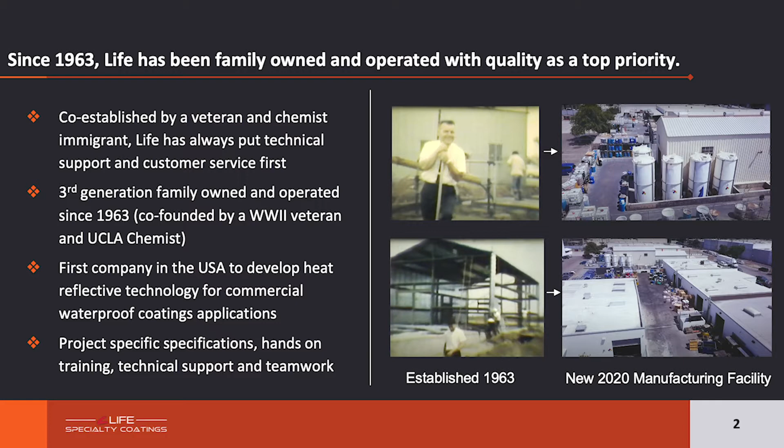As a quick note, we were the first company in the USA to develop heat reflective technology for commercial waterproof coatings applications. Right after Desert Storm, we started to develop technology that was used during the war that protected and hid our tanks in the desert. We used that same technology and integrated it within our waterproof coatings for roofs, decks, and walls to reduce the temperature inside structures, both commercial and residential. It actually helps with fade retention and also helps with reducing temperature inside the structure itself.

A little bit more about the company and what we're all about. We love to write specs. We love to get down in the trenches and check out the full product itself on site. So we love to do the job inspections. We love to write hard specs and proprietary specifications, whether it's with an architect, a manager, or a contractor. Then once we walk that project, we love to help award a warranty along with contractors. We also love to look at blueprints beforehand for pre-construction design.

Also, one thing we do that not a lot of other companies do in the industry is we're actually in-house manufacturing. So we're not two-stepping a lot of products; we're actually manufacturing those products in-house. What that means is we always do all the quality control in-house. The R&D department and quality control make sure that every product that goes out to our distributors is a quality product.

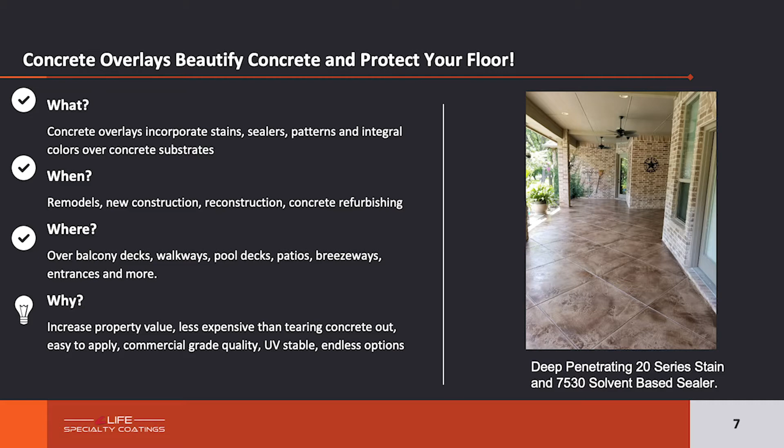What's nice is it keeps your costs down, makes everything look good, and you don't have to tear out the concrete and redo it. Plus a lot of the coatings are UV stable, so they hold up against ultraviolet rays from the sun and won't fade out as quickly. There's a lot of different things we'll be covering as we move on.

Now we'll talk about penetrating stains and semi-opaque stains. We make a lot of different types of stains. We have a translucent stain, which is a penetrating stain that gives you mottling and penetrates into the surface - you can seal it, and it's UV stable. As you can see in the picture on the right, we've done it with multiple colors of penetrating stain, showing the mottling effect, giving a really nice rich, safe, and protective finish.

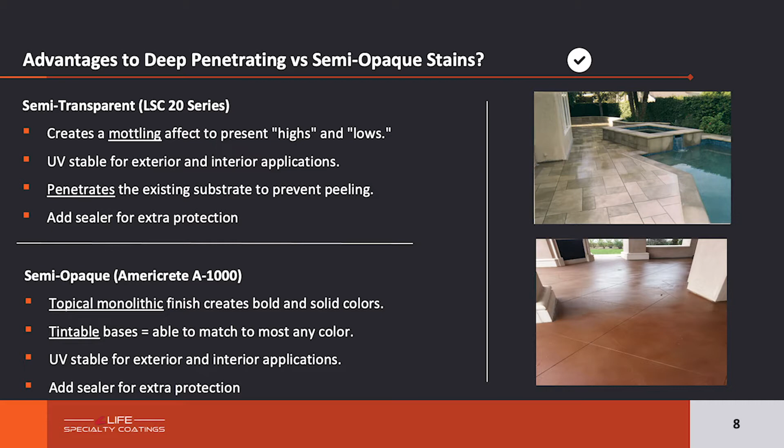On the right side we have the 20 series - our translucent, penetrating stains. Below that we have our semi-opaque stains, and there's a big variety of colors you can use. There's so many different stains and options available. I always suggest you call us or look on our website, and we can get you the information regarding all the different stains or overlays you can use to create whatever look you want.

Now you can see on our left side some of the waterproof systems we offer with different types of finishes - a crater trowel finish, knockdown, some wood plank finishes. There are so many different finishes you can do regarding waterproofing on a deck to make it look like whatever you want. That's just an example of a few on the left. On the right side you can see a lot of the decorative patterns we have to offer.

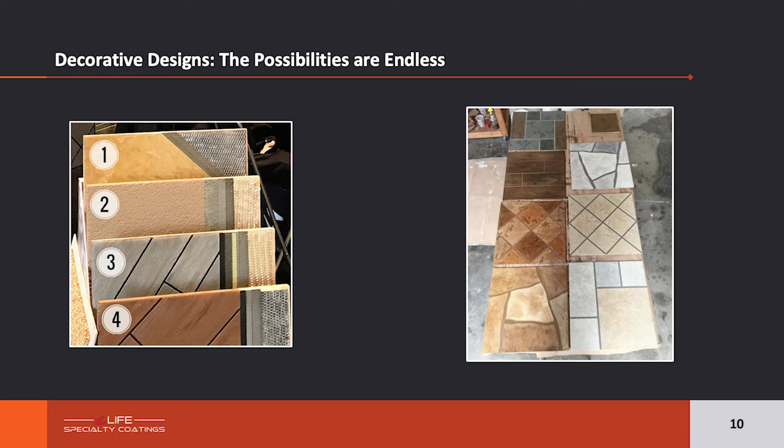Then we have the better option, which gets into CRUs - chemical resistant urethanes that are resistant to a lot of chemicals and higher end stuff, like dropping motor oil or hot grease.

And then we have our best, which are 2-component CRUs, and we have it in water bases. Those are highly chemical resistant, resistant to cooking oils and other chemicals, sulfuric acid. So we have a lot of different sealers to offer - these are all good sealers, and that's just on the water base side.

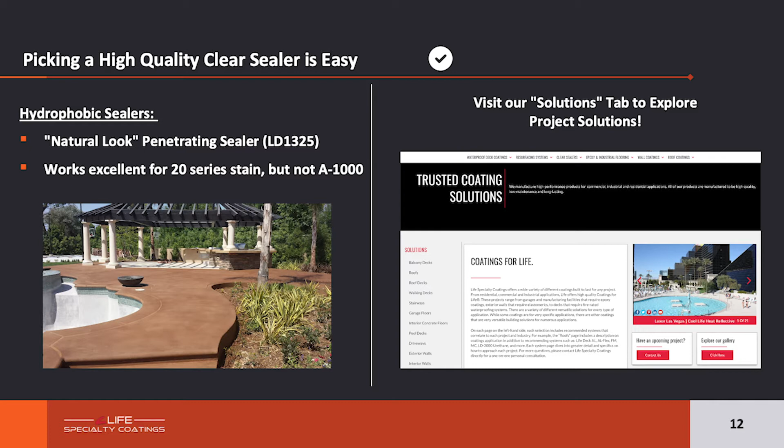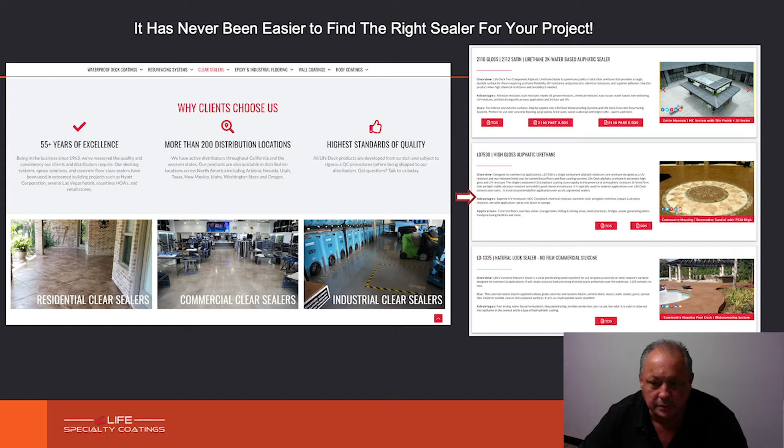Now, as you guys can see, you can go on our website and click onto clear sealers, and it will go over all the different sealers that we manufacture and offer. It will give you information on all the different types of sealers, whether you need a residential type sealer, a heavy commercial, or a heavy industrial sealer. We make so many different types of sealers, so this will give you all the different options that you can do.

There's different ways of doing it. We have vapor seals for vapor drive, we have efflorescence blocks for blocking out efflorescence. We have all different techniques. We have liquid grind for prepping raw concrete, and other methods we recommend like diamond grinding, bead blasting. There's a lot of different types of methods we use, and of course pressure washing the surface at 2,500 psi or more.

Another thing is making sure to clean the surface real well. We recommend using liquid TSP. So there's a lot of different ways of prepping the concrete and preparing it prior to putting down your surface.

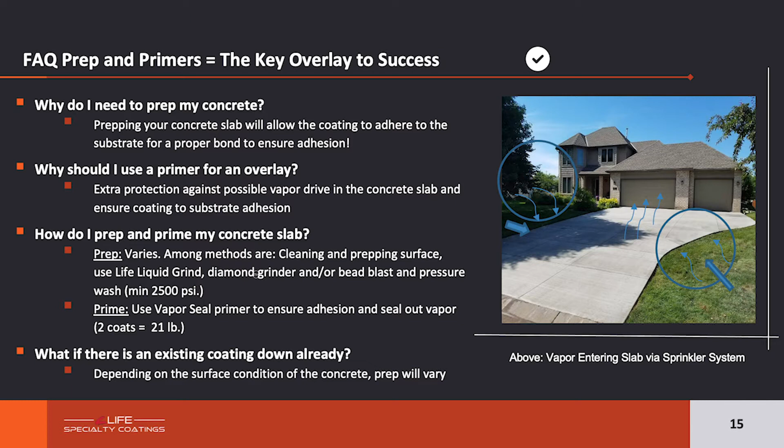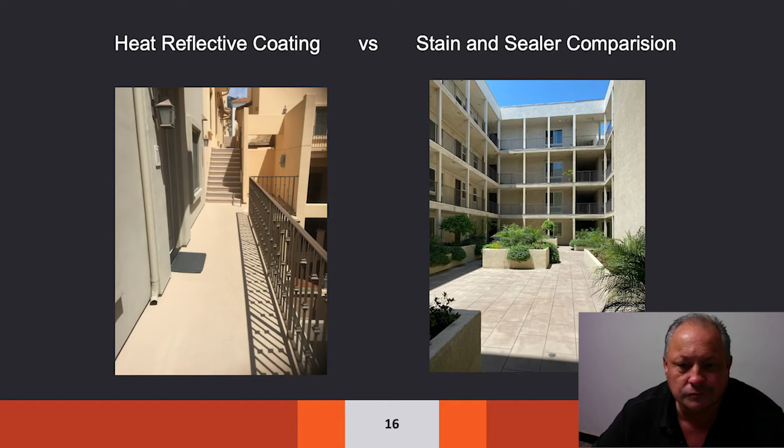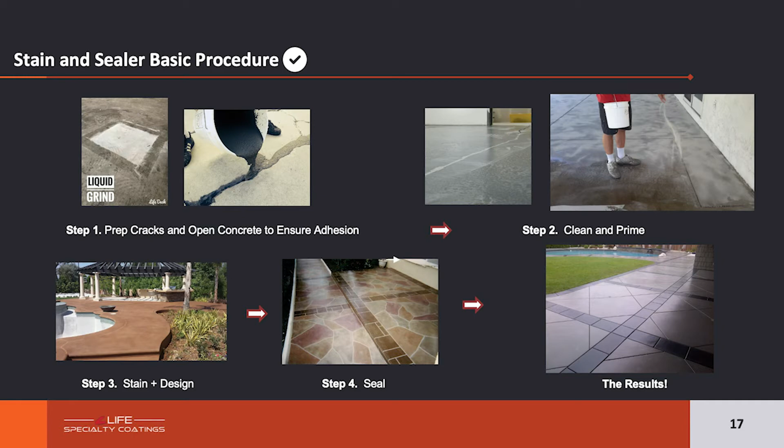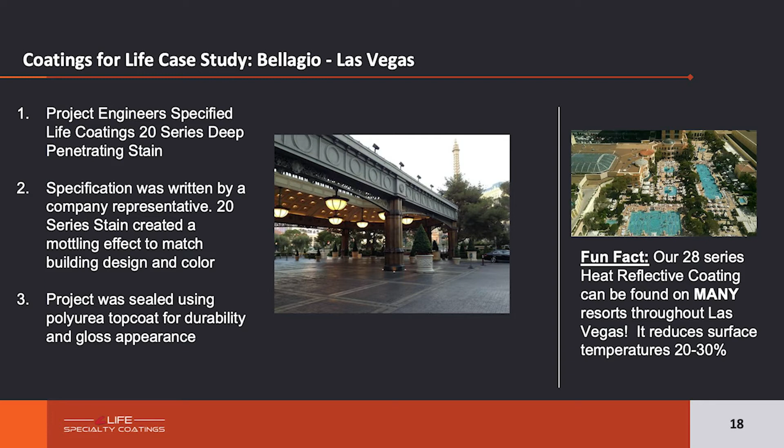There are so many different resorts we've done in Vegas, a lot of different casinos. We've done heat reflective coatings, we've done stains — so many projects in Vegas itself that we've done.

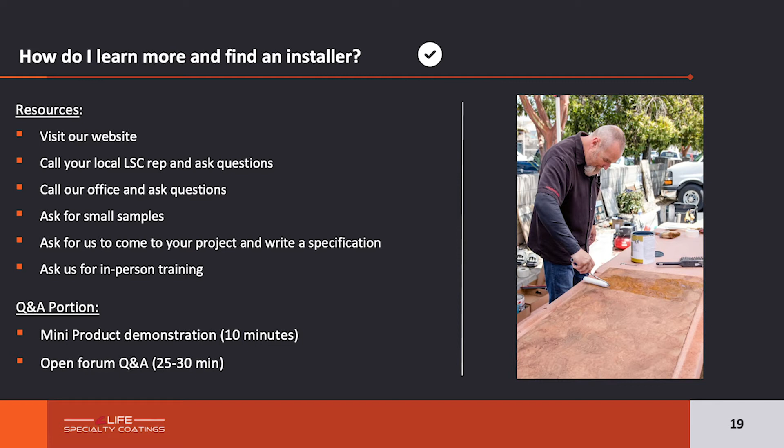We also offer apps on the phone, which are very informative. You can go to our app and download Life Specialty Coatings — it doesn't cost anything. It has instruction videos that are step by step, so you can watch whatever section you want of the installation without having to watch the whole video. It's in steps, which makes it easy to watch and not get mixed up.

We have calculators where you can punch in your square footage for all our different systems, and it gives you a readout of what you need for the job. We also have a lot of information about our company, all the different products we make, and how we've been making products since 1963.

We're a true manufacturer — we make all our products. And besides all our waterproofing and decking, you have choices going to our waterproof wall coatings and roof coatings. We have a lot of different things to offer.

What we're going to do now is give a quick demonstration showing the semi-opaque stains and the translucent stains, so you can see how the end result looks — how you can take regular concrete and turn it into a beautiful finish.